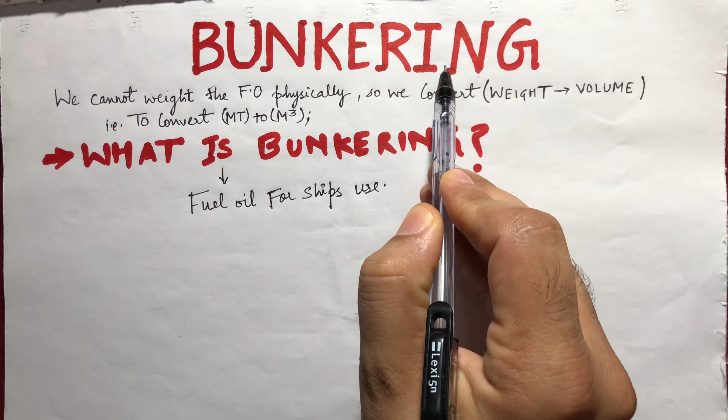So what is bunkering? Bunkering is supplying of fuel oil for use by ships, and it includes the shipboard logistics of loading fuel and distributing it among the available bunker tanks.

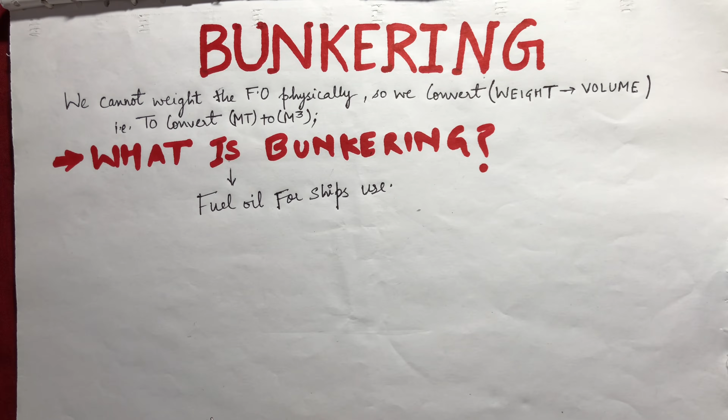Now the bunker fuel or bunker crude is technically any type of fuel oil which is used on board vessels, and its name is derived from the coal bunkers where the fuel was originally stored. So that is the reason why the ship's fuel is known as bunker.

Bunker fuel is a term given to any fuel poured into a ship's bunker to power its engine. Now, cargo vessels typically burn heavy fuel oil, known as HFO, residual oil left over after the gasoline, diesel, and other light hydrocarbons are extracted from the crude oil during the refining process.

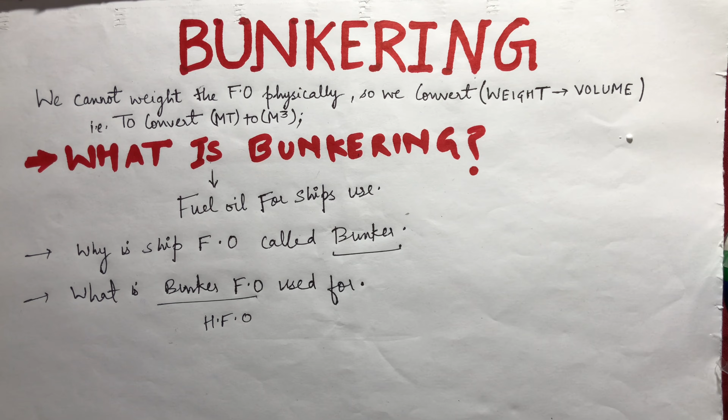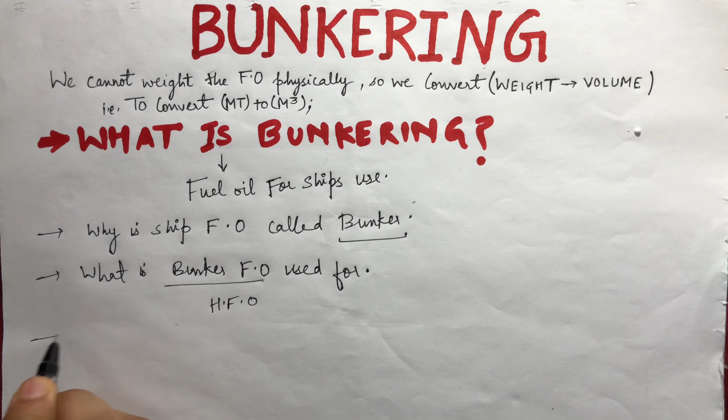Now, bunkering operation involves a couple of documents which are very important. These are bunker documentation. Bunkering operation involves the bunkering safety checklist, that is the company's SMS checklist, which is given by the company and that we need to follow from A to Z in order to ensure safe bunkering operation.

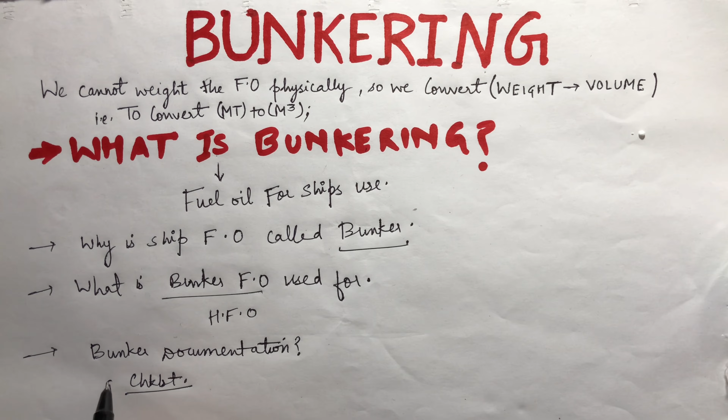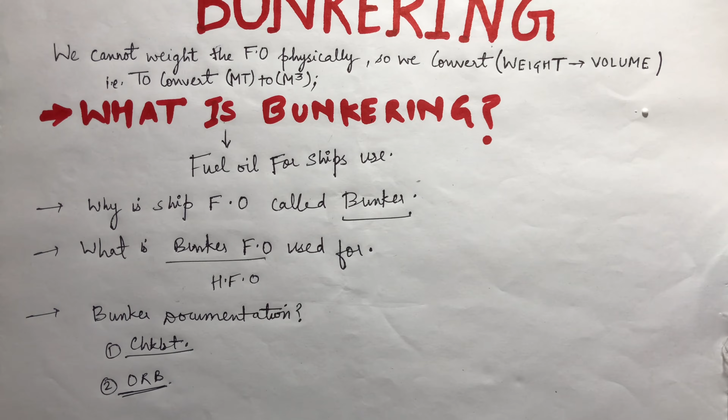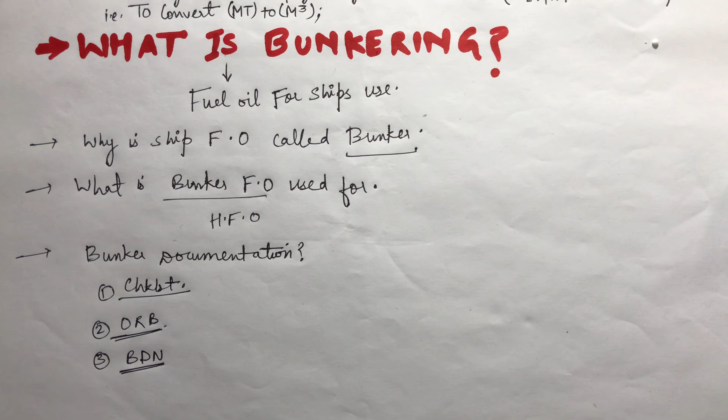Number two is your oil record book, which is an IMO and MARPOL regulation as per Annex 1, that is mandatory to be carried and properly filled during the bunkering operation. Number three is your BDN, a bunker delivery note, which is provided by the supplier after the successful completion of the bunkering operation.

And number four is your bunker sample log. This is like a register which we have to fill after the bunkering operation, and we need to maintain it for further inspection and vetting operations.

Now for each bunker delivery note, the following records are to be properly filled and logged down. Number one is any supporting documents, such as a letter of protest if there is any, bunker survey reports, bunker quality certificates, and bunker receipts. These are to be attached along with the bunker delivery note.

Number two, your BDN shall have a couple of information: the name and IMO of the receiving ship on which we are taking the bunker. Then it shall have the name of the port where you are taking the bunker, the date of commencement of the delivery of your bunker oil, then the name, address, and telephone number of the fuel supplier.

The product name shall be properly mentioned, and the quantity that you have actually received in metric tons. We'll be discussing in detail why we write it in metric tons and not in cubic meters. Another important thing is the density of the fuel oil you are receiving at 15 degrees Celsius in kg per cubic meter.

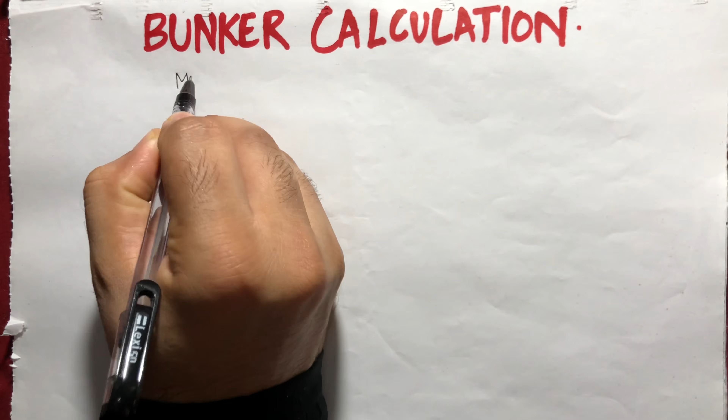This is the first question which comes into mind. Now the volume of a definite quantity of bunker increases with the increase in temperature, whereas the weight remains the same. So that is why we are calculating it in metric tons, not in meter cube. Now we cannot actually weigh the fuel oil physically, so that is the reason why we convert the weight into volume. So now I'll start: that metric ton is to be converted into meter cube.

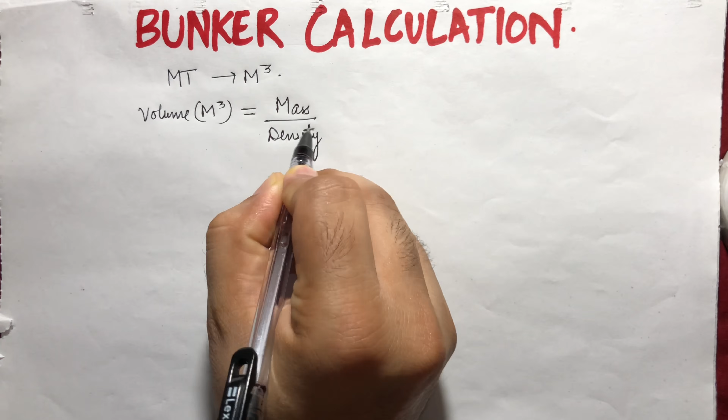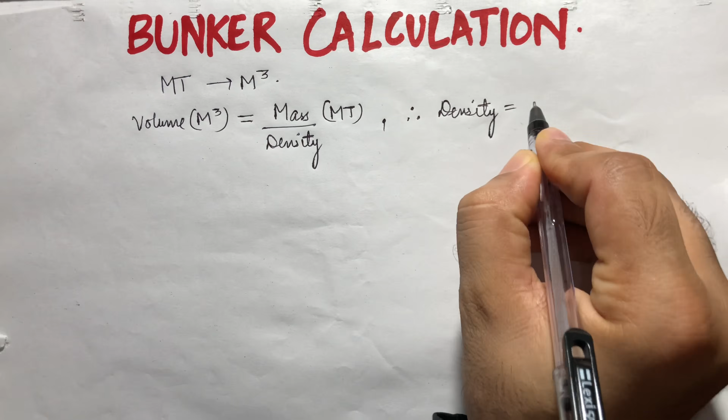Now, in order to convert the metric ton into the meter cube, we have a formula, that is volume, which is meter cube, is equal to mass over density. The mass we have is in metric tons, so therefore your density is equal to mass by volume. Now here the density that we are talking about is the corrected density. So density is the corrected density.

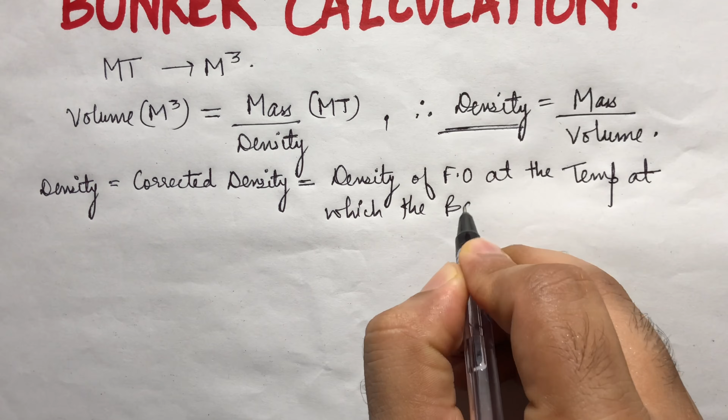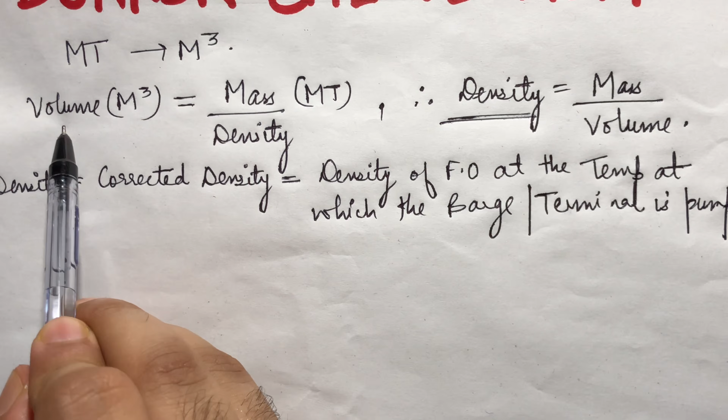Now this corrected density is what? This is the density of fuel oil at the temperature at which the barge or your terminal is pumping. So we know that volume is equal to mass over density. The density becomes mass divided by volume, and we need a corrected density, as we said earlier. The density of the fuel oil at the temperature at which your barge is pumping, that will be the corrected density.

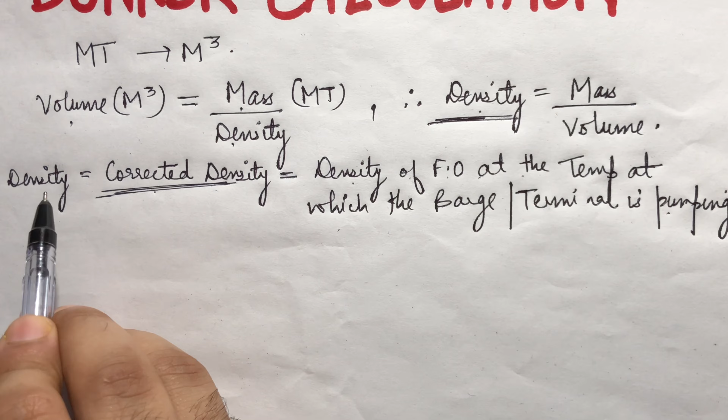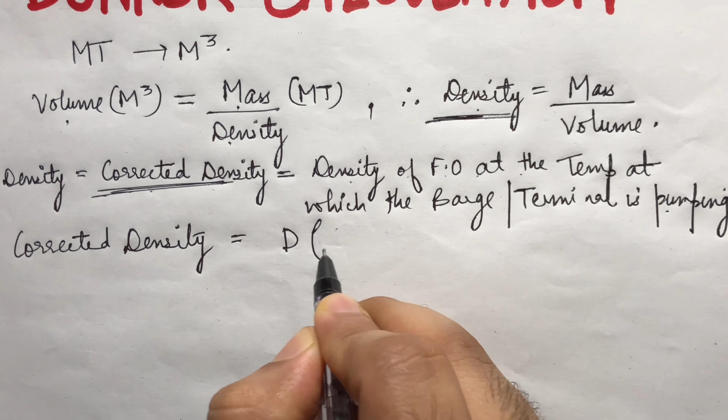Now we have a formula for corrected density, which is equal to D (1 - 0.000645 (t - 15)). Here the D that I have written is the density at 15 degrees Celsius. That is given in the BDN. So this is the density at 15 degrees Celsius we get from the bunker delivery note only. Now the temperature that I have mentioned here is the temperature of the fuel oil at which the barge is pumping oil.

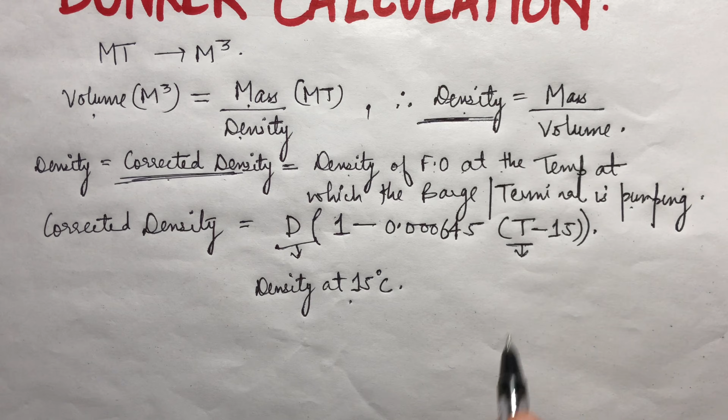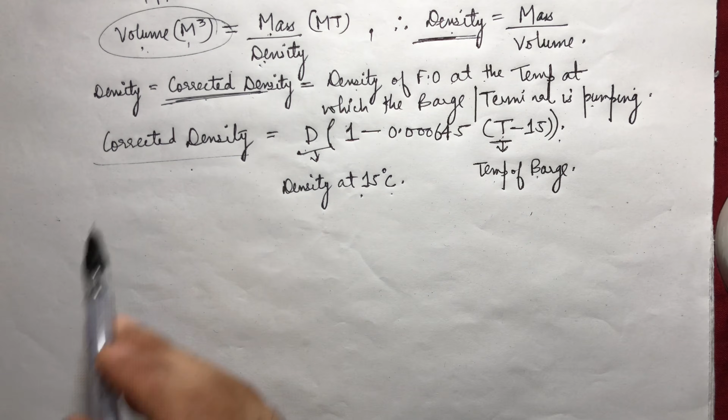So now we have density at 15 degrees Celsius and we have the temperature at which the barge is pumping the fuel oil. These were the only 2 variables in the corrected density formula. So now we find the corrected density and put it in the basic formula, that is volume is equal to mass over density. From here we'll get the total volume of the bunker. Then we'll check the sounding table, find the volume by checking the trim of our ship, and so we'll get the final ullage or the sounding of the tank we are looking for. This is how we calculate the bunker.

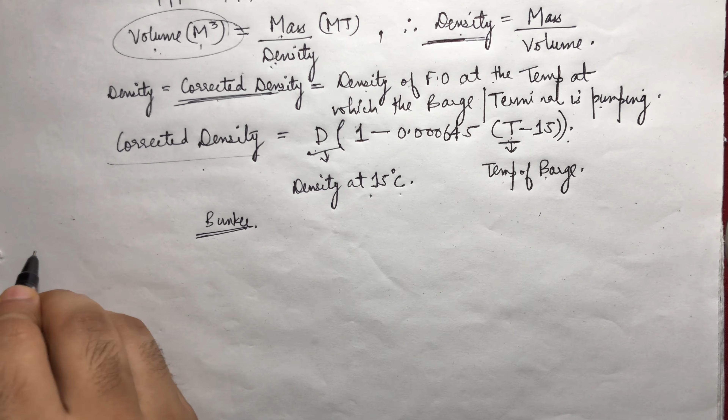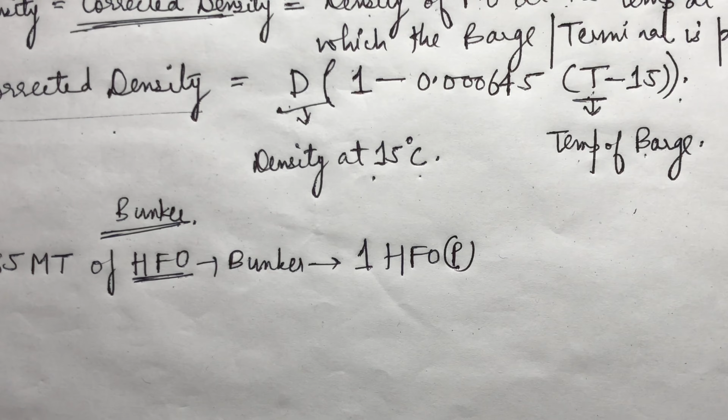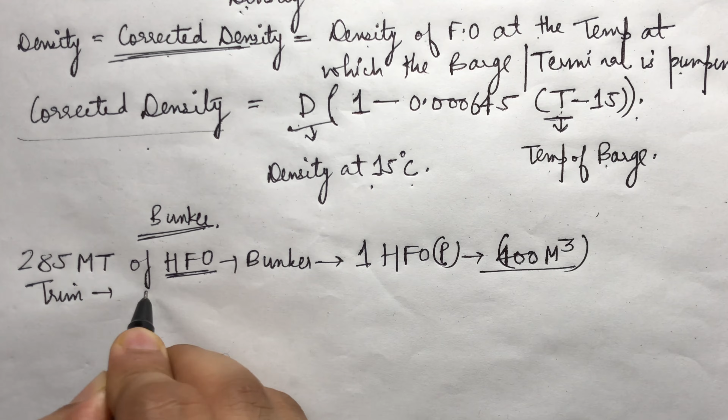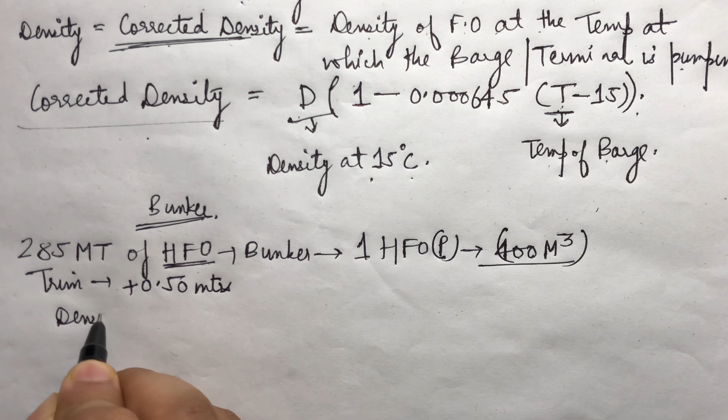Now let's take an example. Consider we have 285 metric tons of HFO that needs to be bunkered in our ship in number 1 HFO port bunker tank, whose total capacity is 400 meter cubes. Trim of the ship is 0.50 meters positive. Now the information we get from the bunker advice form is the density, 0.9909. The temperature of the fuel oil at which the barge is pumping is 50 degrees Celsius. So we have to calculate.

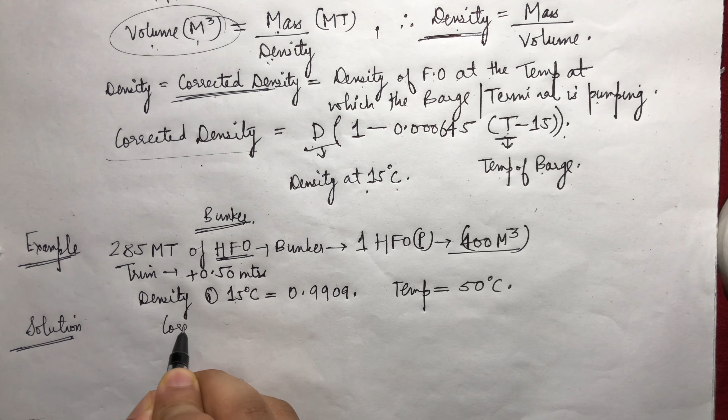Now, the corrected density we know is equal to D (1 - 0.000645 (T - 15)). So corrected density is equal to 0.9909 (1 - 0.000645 (50 - 15)), since the temperature at which the barge is pumping oil is 50 degrees Celsius. So therefore what we get is 0.9685. Now this is your corrected density.

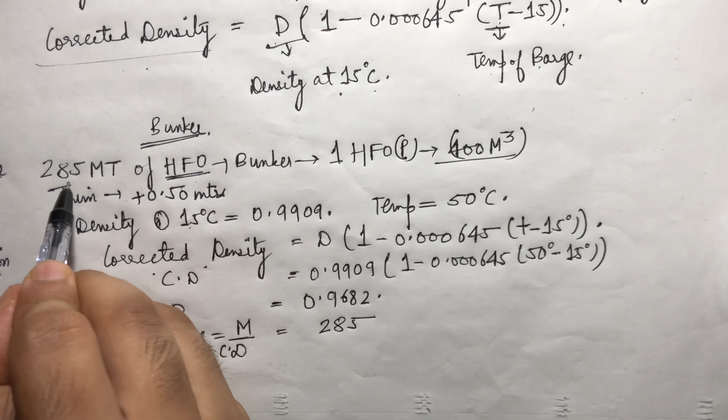So volume is equal to mass over corrected density, which is equal to 285, because we want 285 metric tons, divided by the corrected density, 0.9682, which comes to 294.35 meter cube. This is the volume that we get using the corrected density formula. Now from the sounding table for the number 1 port bunker tank, we'll find 294.35 meter cube. From there we'll get the final ullage or the sounding for the bunker tank we actually want.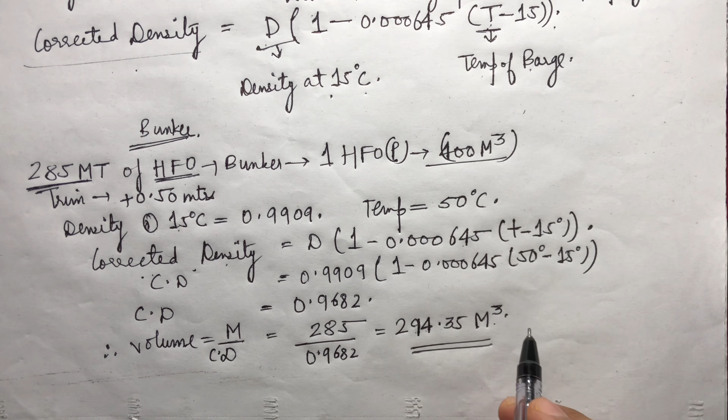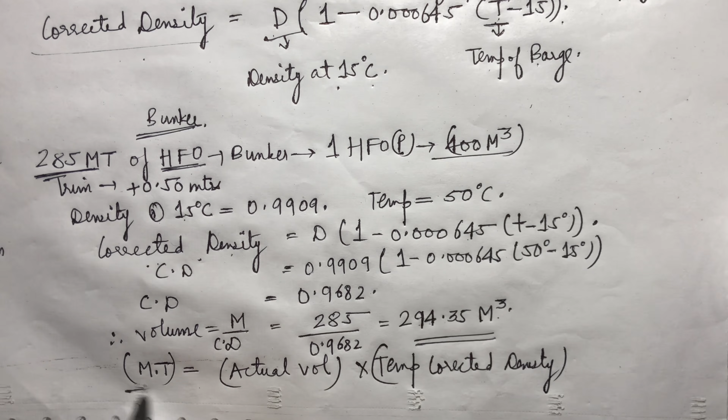Now if we want the mass of the fuel oil in metric tons, what we do is actual volume multiplied by the temperature corrected density. So this is the formula for calculating the mass: we take the actual volume and the temperature corrected density, and we'll get the metric tons. This is how we do the bunker calculation. Very easy and very simply explained.